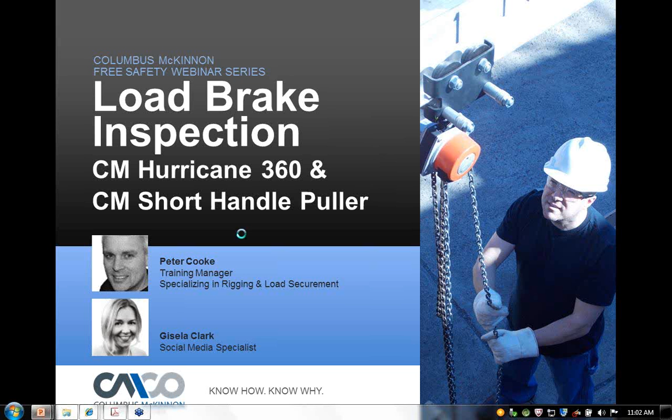Hi, thank you for attending the webinar today, and we'll get right into it. Today's topic will be how a hoist load brake works. We need to know and understand how it works in order to inspect it, identify the parts in a load brake, and we're going to focus in on the Hurricane 360 and the short handle puller. We're going to show a disassembly of each one, how to inspect each one, and how to reset it. I'll take questions at the end. Hopefully this is informative to you and you get a little bit more comfortable utilizing our hoists.

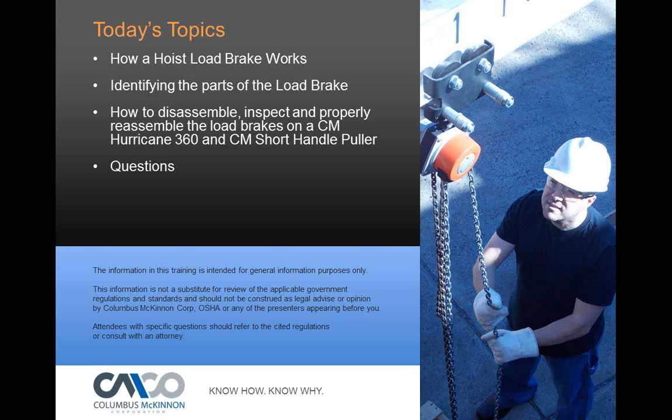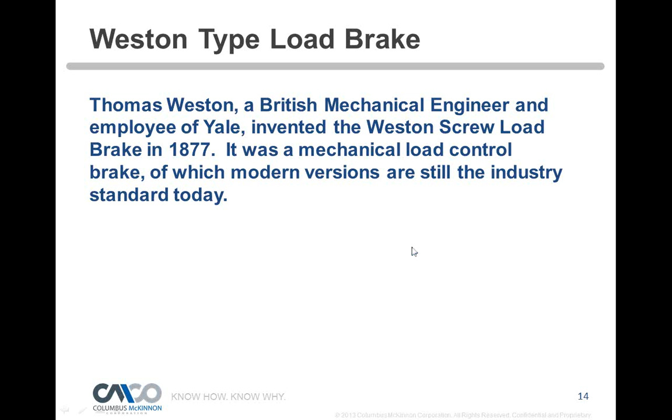So, Weston type load brake, what does that mean when you hear the Weston type load brake? Well, it's actually named after a gentleman, Thomas Weston, an engineer who designed it close to the turn of the century. The concept is used in many modern hoists today, and it's a very unique design. I'm sure he didn't get much for his design, but it's used even today. The design was an excellent design and really revolutionized the industry for material moving and handling.

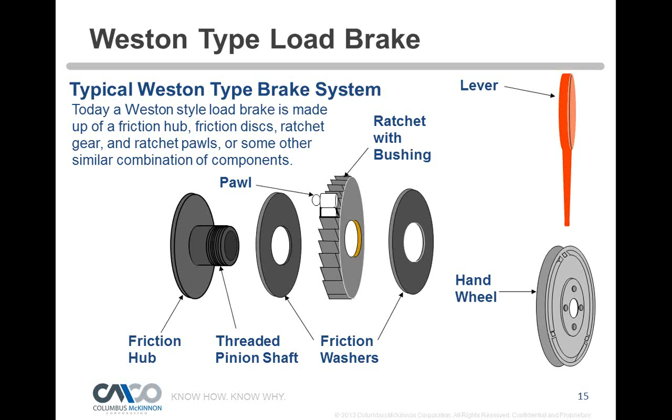And I'll get into how it operates and how it functions. Here you can see an actual hoist mechanism for a 640 puller, where it shows the brake hub or cam sandwiched in between 2 friction discs and a ratchet. And then what's going through all that, you can actually see the load shaft, or where the chain rides up on there, and that's a pinion shaft going through all that. So again, that's another view of it there, a real life view of a 640 puller.

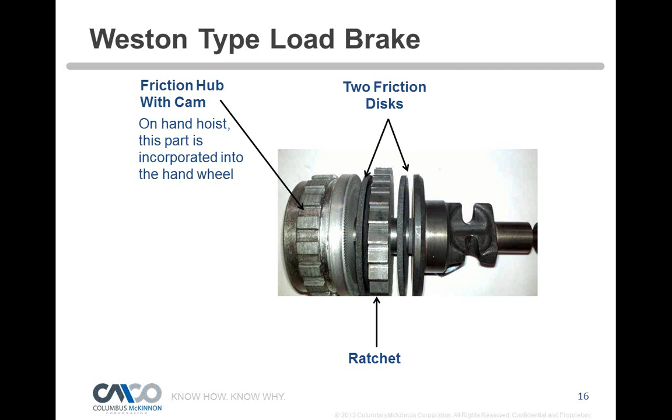So how does this work? Either as you lift the load, by operating a lever or pulling the hand chain, it causes the hoist load shaft or chain sprocket to rotate, therefore lifting or pulling the load chain. The load shaft is connected to the Weston style brake components. As you're realizing a force, it causes the brake components to squeeze together, therefore not allowing the load or force to slip or lower, while engaging the ratchet pawls. So the braking components are squeezed together while you're raising it, which ends up holding the load. So the ratchet and pawls — you have friction working for you, and you have a ratchet and pawl mechanism that's also holding the load.

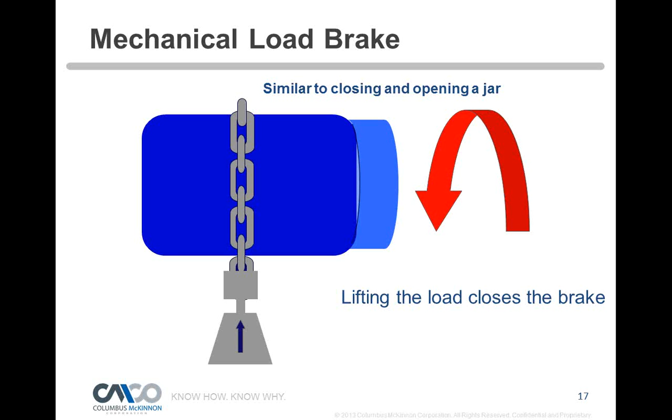So as you're either cranking on the lever or raising the hand chain in the raise mode, it'll squeeze together. When you're lowering in the opposite direction, releasing the load, it causes the spline shaft or pinion to rotate opposite of the lifting rotation, causing the brake components to decompress or loosen, allowing the load to move in a downward direction.

But the gapping when you're opening is so minute that the friction discs actually control the descent of the load, and as soon as you stop operating that unit, it's kind of self-locking. It all squeezes back together and holds the load. So really you're having all these mini free falls, but it looks like a smooth operation the way the brake works.

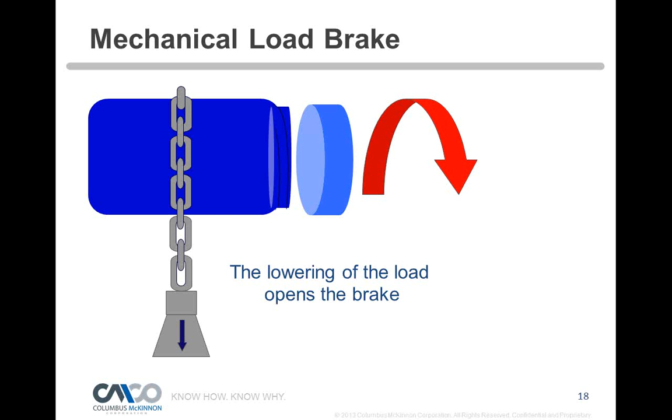So it seems very smooth, but that's pretty much what you're doing: opening the brake with very, very minor gapping, and the load is coming down at a very controlled descent. It's a great design used throughout the hoisting industry, and hopefully I explained that as best I can for you in a visual and literal manner.

So let's take a look at the CM Hurricane 360, the latest version that we launched about a year ago, incorporating the Weston brake to get you acclimated to the Hurricane. It can go all the way from half a ton to 10 ton.

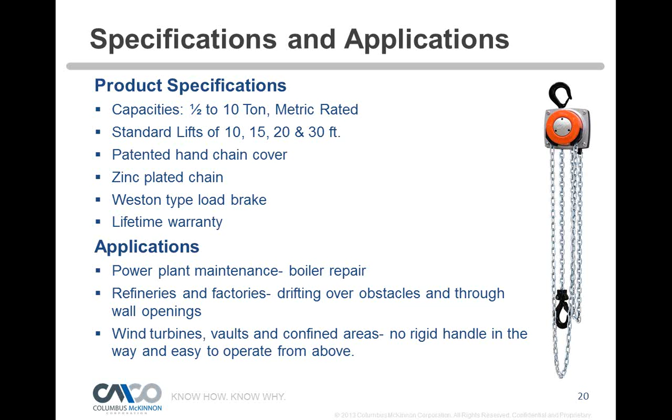It has standard lift zinc-plated chain used in power plants, boiler repair, refineries, factories, wind turbines—pretty much wherever you can use a hand hoist in a maintenance or production situation, a hand hoist can be used.

What's nice about the Hurricane 360 is it's the only hoist where the hand chain can rotate in any direction, so you can stand well away from the load, whereas a typical chain fall requires you to be right close to the load. It's a very unique design and very safe for operators to use. You can see some of the features and benefits of that hoist.

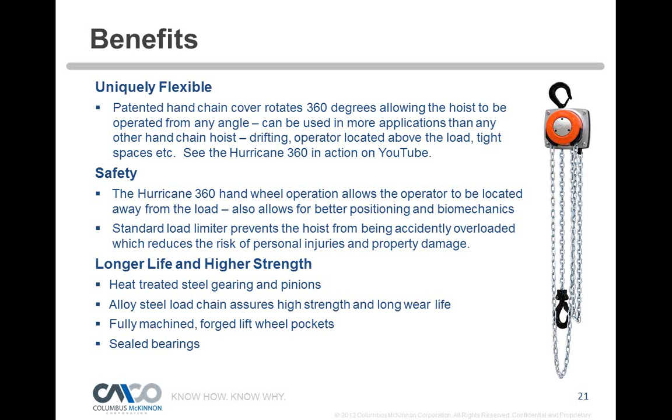So let's break into that hoist.

The first thing we do is get an Allen wrench. We're going to remove, on each corner on the top of the hoist, 4 Allen head screws. Then we can undo that top, and as you can see in the picture below, there's the hand wheel exposed—that's what we want to get to.

Once we get that cover off, we want to seat 2 of the Allen screws back down just to hold everything together, since we do not pull anything else apart while looking at the brake. I recommend taking 2 Allen screws in each of the 2 corners and screwing them back in while you're doing your brake inspection.

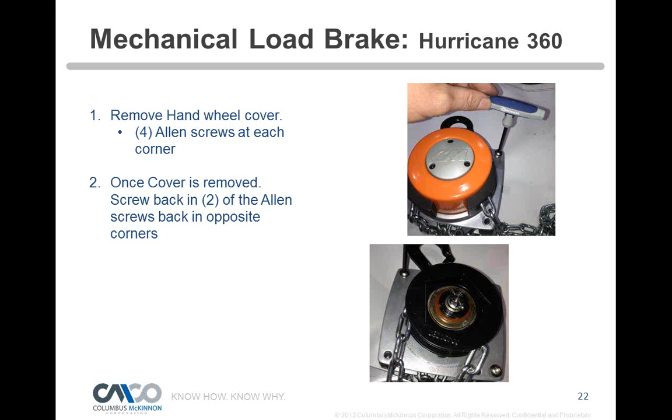So what are we looking at underneath the cover here? We have the hand wheel, and then the pinion shaft that I just talked about that goes through the Weston style brake, secured with a castle nut and cotter key. Below that cotter key, you see the load limiter groove nut, which is for the load limiter.

We're not going to talk about load limiters today, and for a brake inspection we don't have to touch the load limiter. What the load limiter does is prevent excessive lifting of an excessive load. If you lifted too heavy a load, the hand wheel would slip around the load brake and not compress anything, so it wouldn't allow you to lift—you're just slipping the hand wheel. So it prevents gross overload, but in this presentation we're not going to get in depth on that.

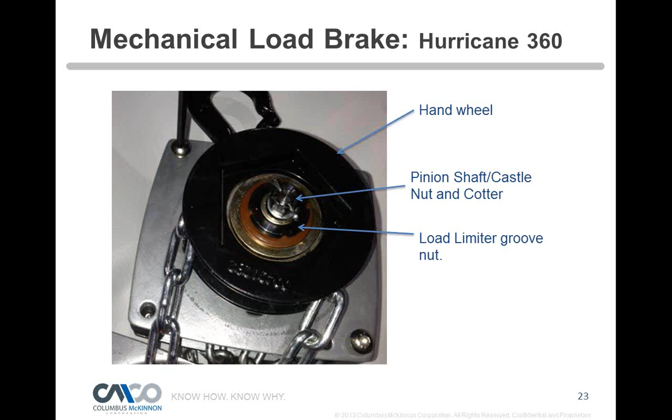We have another series coming up next month where we'll talk about setting those load limiters. So the first step we want to do is remove that cotter key and castle nut. Again, we're not going to loosen that large black nut we see for the load limiter—I'll just highlight here, this black nut, we do not want to loosen.

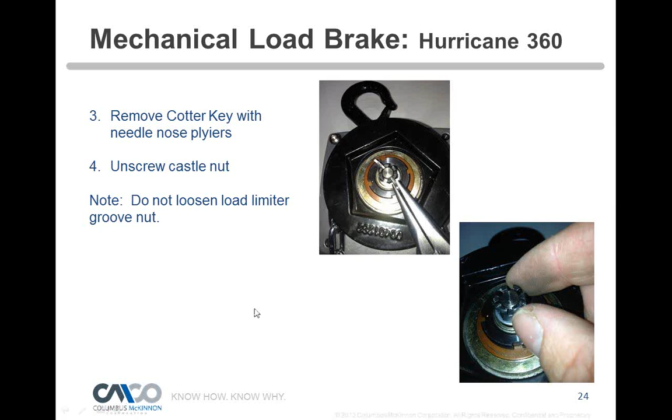Take that cotter key off, and then by hand you can undo the castle nut, and that'll get you into the next level of the hoist by being able to take that hand wheel off. While holding the chain, unscrew the hand wheel counterclockwise, and that whole hand wheel will come right off.

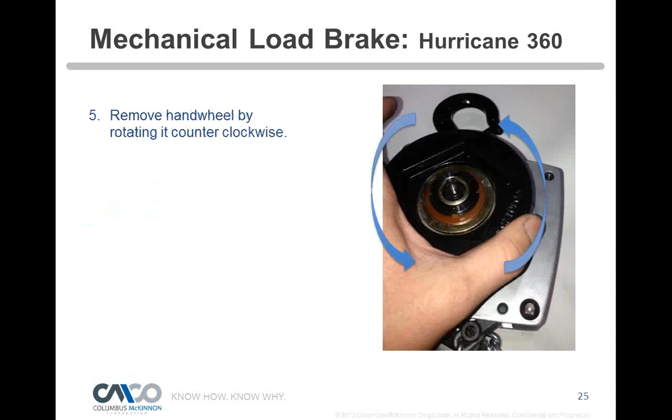So there we see the Weston brake exposed. Behind that hand wheel is the braking surface, you can see that's the brake hub. Then there's the pinion shaft going through, and then the friction disc, ratchet and pawl, and then the ratchet. You're going to see the exact same thing underneath it, another friction disc and another brake hub.

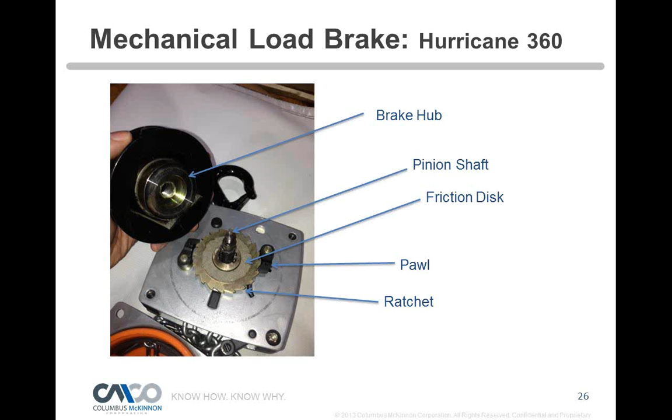So the first thing we want to do in our inspection is look at that braking surface, and we want to look for any types of contamination, excessive scoring, rust, anything that's drawing our attention.

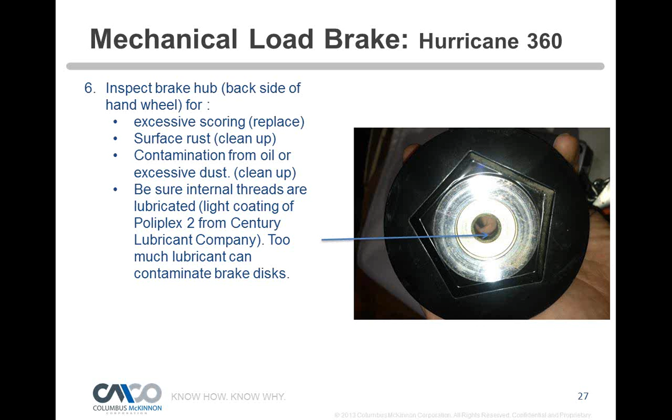We also want to be sure that any threaded shaft, that internal thread - now we don't want oil on the braking surface, but when we teach, a lot of people think there should be no oil at all in this section, and that's really not the case. Those threads do need to be lubricated, but with a very light film, because you want the brake to open and close easily, and if it's got any rust or if it's binding at all, it won't operate correctly. So too much oil would be a bad thing, but we want to be sure there is some lubrication on the threads, on the pinion shaft threads, and the internal threads on that hub. But make sure the braking surfaces are free from any contaminants, and you want to clean that up as best you can when you're doing your inspection.

So next thing we want to look at is the friction discs and the ratchet, and we're going to inspect the condition of those. We're looking again for any contamination, and then we got what's called glazing - glazing is a glassy type surface. If a hoist has been used, naturally it'll become glazy, like a glass type surface, and that's really something we don't want to see.

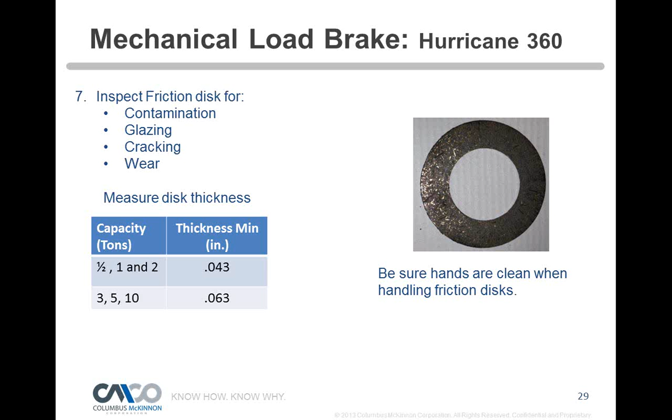Because as those wear down, that gap - as when I talked about the Weston brake, as you release the gap, if there's not much friction surface there, the gap gets larger, so the hoist load will start to drift more. As you stop that operation, it takes a little bit - you want that instant stop, and that's what the right thickness of the friction disc gives you. If you don't have that instant stop, you'll get what's called load drift. The load will creep down slowly, and that's showing that it has to overcome too thin of a disc to grab on, so that's a clear sign that there's something wrong with the brake, or the friction discs are worn out.

Next, we want to look at the ratchet, and it's a metal braking surface, so we want to be sure that's cleaned up. By the way, going back to the friction discs - we do not want to use any cleaners whatsoever on the friction discs. You don't want to spray them with anything, so no brake cleaner at all on the friction discs. On metal parts such as the ratchet here, you can just make sure you wipe it up so you do not contaminate the friction disc. So again, check for excessive scoring or any type of wear, check out the ratchet teeth that they're not peened over or chipped or missing, because we do want good pawl engagement, because that's what also aids in holding the load.

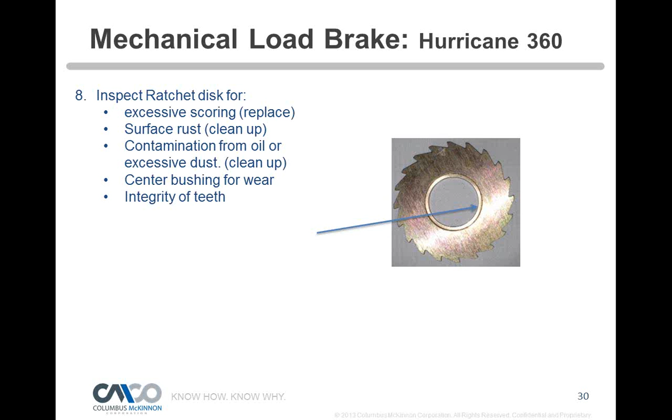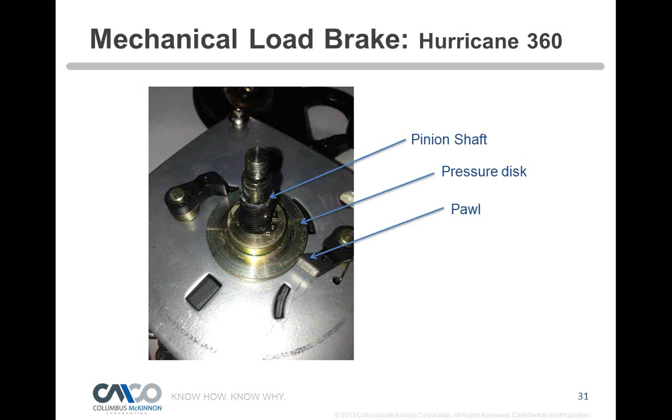Take a look at everything, especially that bushing—that's what the pinion shaft rides around, so it can wear. We want to check the wear in those bushings, and if you see any type of wear, or you're in doubt, replace the components. Then as you move down, look at the threads on the pinion shaft, the pressure plate or disc, and the condition of the pawls.

Look for damaged threads. Again, lubrication is important on those threads—a very light film. If we go crazy with it, that will leach onto the friction disc, so we just want a light film on there.

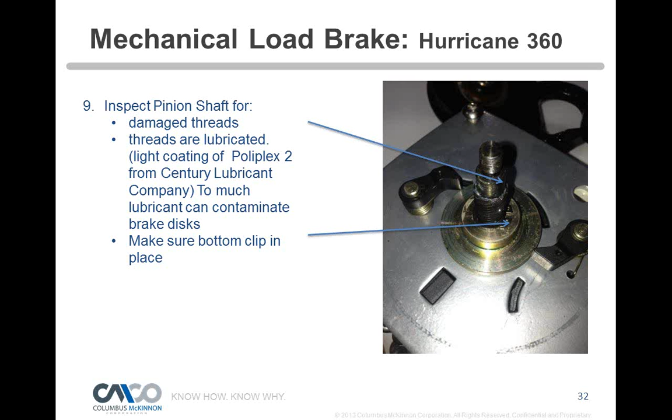We want to ensure the brake is opening and closing properly. There's a small clip that holds the pinion shaft in place—make sure that's seated properly and not very loose or anything like that. Then again, check out the pawls.

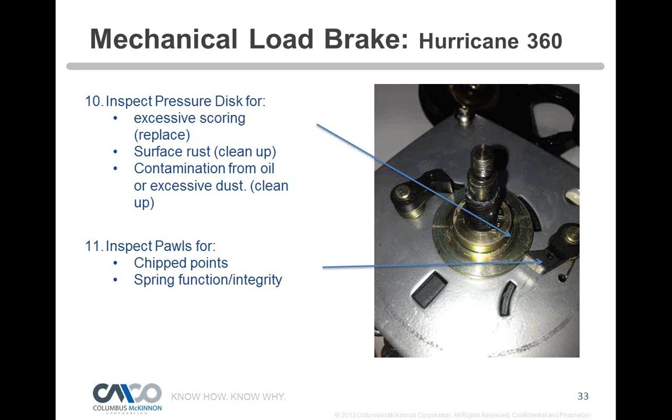We want to get rid of any excessive dirt. Sometimes you'll see brake dust, especially if the hoist is used heavily, so wipe away any brake dust and things of that nature. Check out the springs—are the pawl springs working correctly and seated properly? You could find a pretty loose spring that doesn't have much tension, which is a sign you'd want to replace that component.

Once you're satisfied with the brake assembly—whether you decided to replace discs or didn't have to replace anything and are just doing preventative maintenance—I recommend doing this yearly on a hand hoist. It's pretty simple to do. It's not required by ASME; they say if the hoist is functioning properly, the technician doesn't have to go into it any further than need be.

It can be done while the hoist is hanging in place, but I do recommend it—they're so simple and easy to get down, and usually you can inspect them quickly and get them back up and running. So reassemble in reverse order, and once you turn that hand wheel back on, you want to hold the chain as tight as you can. You're putting some tension on that brake, or pre-tensioning it, to seat it back down before you put the castle nut and cotter key back on top.

Once everything's reassembled, hang that hoist and put a light load on it—at least 50 pounds times the number of load supporting parts of chain. So a single reeve hoist, with just one part of chain going down to the hook, that would be 50 pounds. If it's double reeve, meaning 2 parts of chain going through a hook block near the hook, that would be 100 pounds, and so forth. You can do the math. This checks the functionality of the hoist, and if there's a problem, you'll see it won't even hold the light load. So you can check functionality and do an operational test.

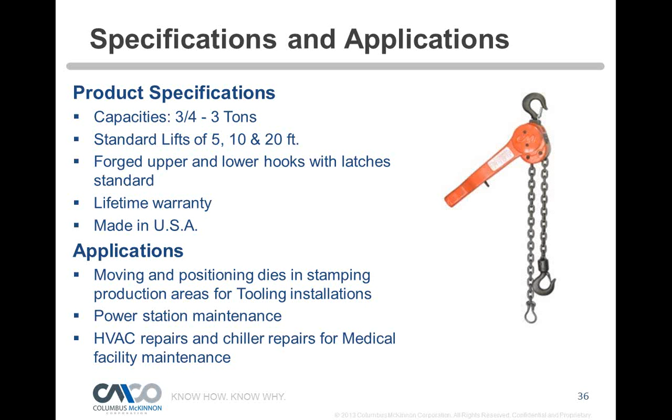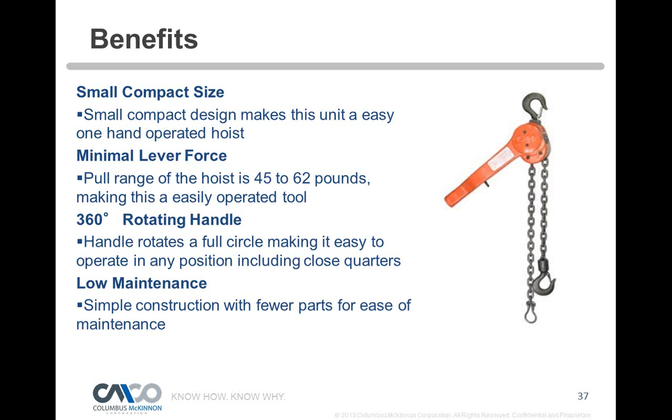It's small, compact. The nice thing about the short handle puller is that it's weatherized. It's not like a typical import design where it's all wide open where you can see into it. It's fully enclosed, and this tool is made for precise positioning and micro inching. So it's a very, very nice tool.

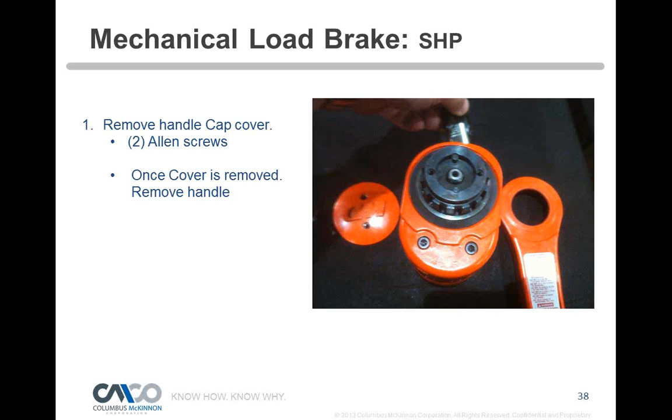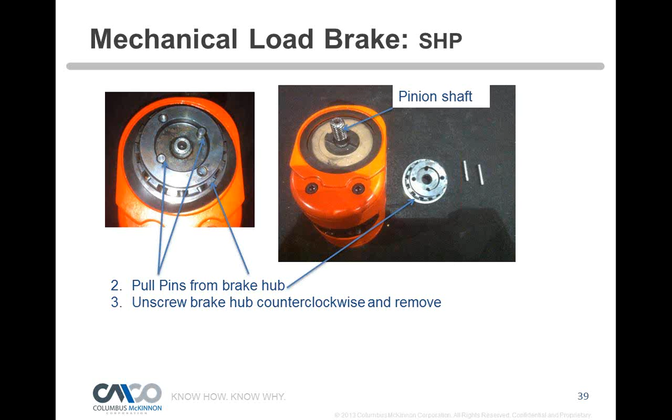So we want to take on the short handle puller. There are 2 pins, so this is a little bit different. After we remove that cap, we want to remove those 2 pins - those are the brake locking pins. They come right out, and you can see in the picture to the right, the 2 pins laying there next to the brake hub. Once we remove those 2 pins, we just turn the brake hub counterclockwise and it'll come right off - it'll thread off that pinion shaft. So it's a very similar design.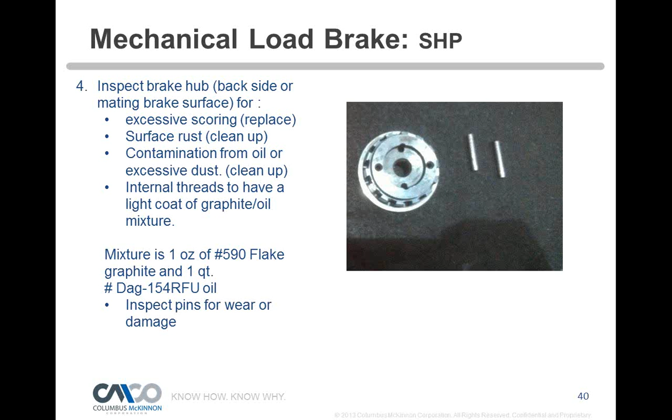So we want to inspect that hub first and those pins, make sure there's no wear, dents, or bending. And on the back side of that hub, just like we looked at on the back side of the hand wheel, same exact thing - we're looking for contamination, surface rust, anything causing concern, we want to try to clean it up. The internal threads of that brake hub need a light film of lubrication. So we want to be sure that brake can open and close and it's not binding up on the pinion shaft.

To remove the brake cover, there are another two Allen screws that will remove the cover to the brake.

On the short handle puller there is a seal on the outside. That's what makes it weatherized and fully enclosed. So if you're working in a mining environment or a lot of dust, things of that nature, it protects it from all that stuff getting inside. It's a really advanced type of lever tool that protects it from a lot of contaminants, so we want to check the integrity of that seal.

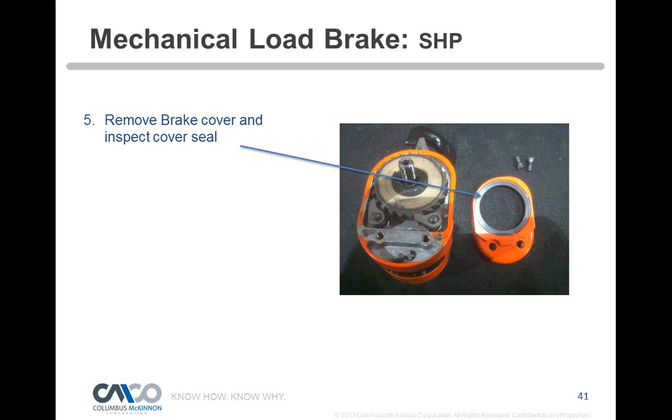Then we can look at the components. Again, it's the Weston type brake, so we're looking at a friction disc, a ratchet, and a brake hub. Those are all the components.

It's the same exact inspection that we did on the 360 Hurricane, except the discs are a little bit different. These discs are made of metal, whereas on the Hurricane the discs were a composite material that was pressed together. So these discs, if they do get contaminated, can be wiped off because they're metal.

You can wipe off oil from them, so it's a little bit more of an advanced tool. We use a specialty type of steel for our friction surface, and the minimum thickness on those discs is 0.075 inches. As you can see, metal is not going to wear as fast as a composite material, so you're not going to get brake dust and things of that nature. It's a little bit more of a high-end type brake, which I like a lot.

You don't have to worry about oil contamination on the discs in the sense of ruining them, but you do have to worry about oil getting on those surfaces because it could affect how the brake works. You wouldn't have to throw the discs away if that happened, you would just have to clean them up. But it's the exact same inspection that we did on the Hurricane 360.

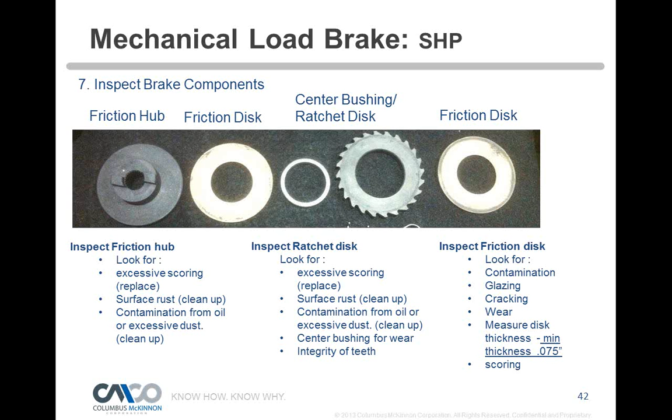And then, of course, the pinion shaft we're looking at for damaged threads, and again the light lubrication we've been talking about, and the ratchet pawls we want to inspect as well, and the spring tensioning. And there's your full-blown brake inspection.

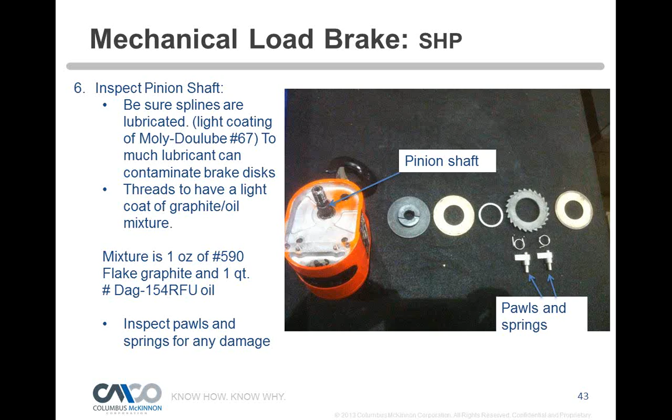However, assembly of this unit is a little bit different and unique, and I want to talk about that because it is a precision tool, a very precise tool, so it's a little bit different how we assemble it. We assemble it in reverse order, putting everything back until we get to that hub and the pins, and this is where it's critical that we understand how to set it.

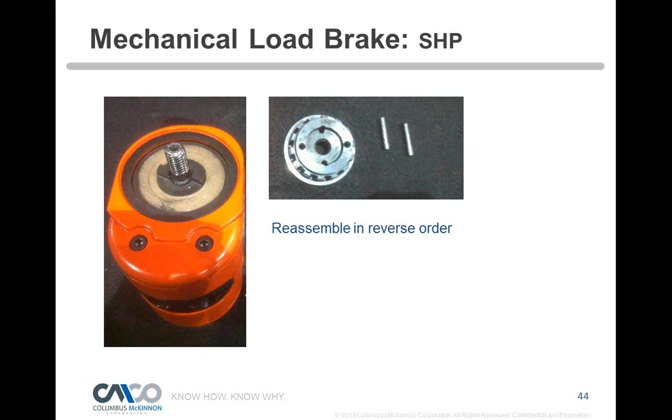There's a unique setting to this lever tool and how to get that brake set right. We set it so that when we open up that gapping so the load can come down and we can lower it to the ground, it's set right so that we don't open it too much. We're going to go through how to do it.

So we take that brake hub, and in the first picture you can see it without the hub on there. You can see the pinion, a bird's eye view of that pinion shaft looking at us. I want to note here, these black bumps right here are the stops, and that's going to be critical. I also want to make note, make sure those pawls are seated properly within the sprocket.

So we're going to screw that brake hub back on clockwise until everything is tight. Then we're going to put those pins back in, those locking pins. Those pins are shown right here - here's a locking pin here, and here's a locking pin here.

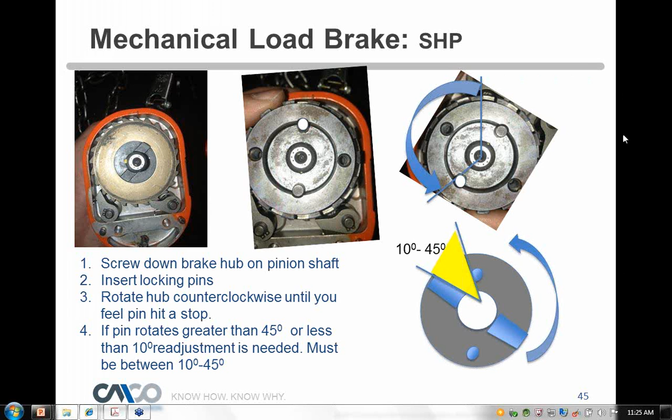I'm going to try to explain that one more time here in a visual. Whoops, let me go back up here. Oh boy, hit the wrong button, bear with me.

Here's the brake hub, and I'm going to get out of presentation mode so I can show this. You bring this brake hub onto your pinion shaft. Once you're on there, it's got a 4-lead thread start, so you go clockwise and screw this all the way down until it's tight. It's going to lock in. Then you put your locking pins in these two holes here. Once those locking pins are in, you go counterclockwise and see where you're moving.

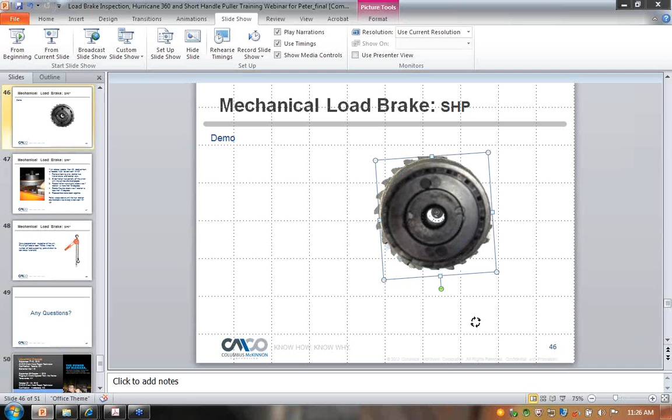This is about as much movement counterclockwise as we'd like to see, right about there - 10 to 45 degrees. If it goes too far, if we see it goes all the way around like that, that's too much, so we have to reset that brake or adjust some things. So what do we do there? Let me get back into the current slide.

How to readjust that: you have to take the brake back apart and raise up that hub just till it clears those splines on the pinion shaft. You can see the splines at the bottom on the pinion shaft - raise the hub up just enough to clear those splines. If you're more than 45 degrees, rotate clockwise towards where those pins landed and set it back down. That will close the gapping up a little bit more so you don't have such a big opening. If it's less than 10 degrees, you want to go counterclockwise and move those stops away from where those pins are to let it open up a little bit more. That's how you would set it.

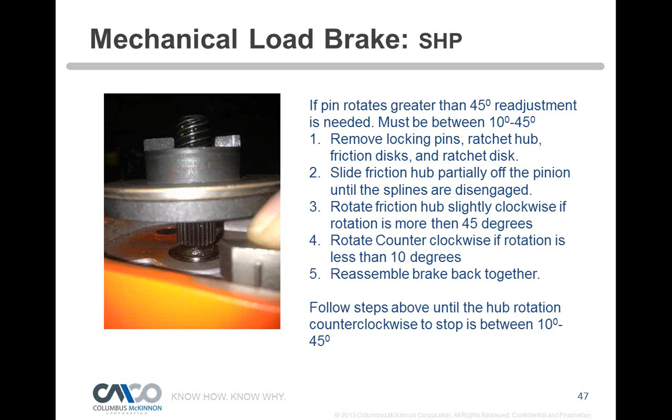It's a little bit of playing around to get it right, but once you understand how to do it, it's very simple, really easy. It's done that way because it's a precision type lever tool. There really isn't any tool on the market that competes with it to be that precise. A typical import design can't do what this tool can do - it can't be used in dusty environments because you get brake contamination.

So it's that simple for the tools - there isn't much to it. Again, you've got to go through your pre-operational inspection once you reassemble it. On lever tools or lever hoists, it's 100 pounds times the number of load supporting parts of chain. In the view to the right there, that's a single reeve, which would require 100 pounds to check the operation. If it was double reeved, or 2 parts chain going to that hook, then it's 200 pounds, and so on - you can do the math.

A load test is optional. We recommend it. The ASME specs say if you don't replace load supporting parts, brake components are considered transmission parts, so a load test wouldn't be required, but CM recommends it. In my opinion, it's a good thing to do a load test to really check it out. Those pre-operational tests are a good thing to do to be sure everything's seated properly.

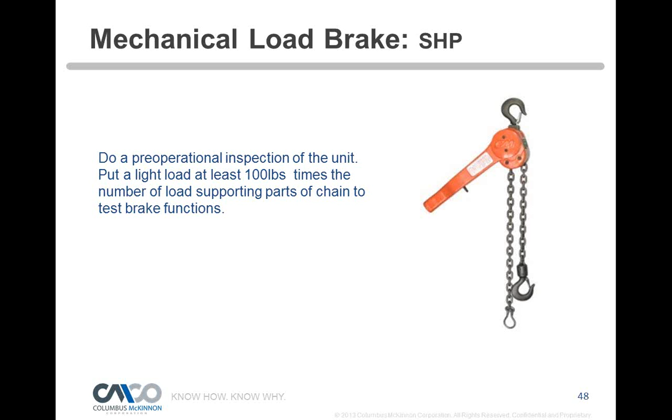While we're doing that, I have one more quick poll. How much should the locking pins on the short handle puller be able to rotate before hitting a stop when the brake is assembled correctly? For those on iPads, put your answer in the question and answer pane since polling may not work there. Otherwise, select 2 to 5 degrees, 10 to 45 degrees, 10 to 90 degrees, or 90 to 180 degrees. Please go ahead and vote. Again, how much should the locking pins on the short handle puller be able to rotate before hitting a stop?

Oh my goodness, this is very interesting. You did a great job communicating, Peter, because we have 100% voting for 10 to 45 degrees. Very good, I'm happy to say. Excellent job, everyone. I'll go ahead and close that, and you can go back to that slide. So we really had 100% get the right answer. That's good to see.

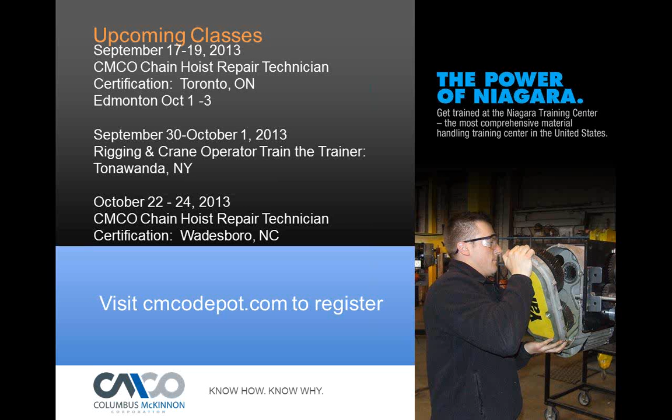I do want to make note, this is a sampling of the things we do in our chain hoist repair technician schools. Obviously we do it hands-on. You have the hoist in front of you, and you work on these and learn how to set it. We go through the same exact instructions for each and every hoist. We just did a small part of inspecting a hoist, just the brake, but we totally disassemble everything and go through every possible wear area, what to look for and how to repair them, put them back into service safely, and do the load testing. So if you're interested in learning from manual hoist to chain hoist, electric, air, wire, and the big wire rope hoist, come out and take the CMCO Chain Hoist Repair Technician Certification course. By the end of the course, you'll pretty much know exactly what to do, what to look for, or how to reference the manuals to figure out how to do it.